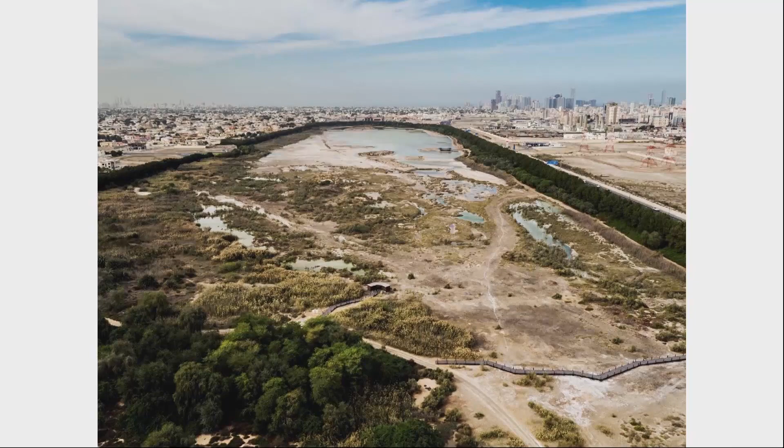This is the first project, the Wasit wetland. The wetland is located in the periphery of two emirates. On the right side you have Sharjah, and on the left side you have Ajman. It's quite strategically located, almost a perfect land to be developed as real estate. It has a lot of value, like many other wetlands in our area.

Having said that, this area was a kind of dumped area, a construction dump area. Over time, lots of toxic plants and bushes had grown, which had in a way damaged the environment. So the whole idea was, how do we work on that? How do we purify the place, and how do we rehabilitate the natural environment within this place?

The government had started the process of purification, removing all the toxic plants, which in a way started attracting many birds, both regional and migrant, as this was one of the few wetlands in the region still functioning as a wetland. It almost became a haven for the birds, so they all came there, nesting and living there.

The process started almost by looking at the section of the site. What could we do? Looking at the existing trees, what are indigenous, what are not indigenous and maybe harmful to the environment. We started by looking at the vegetation, and at purifying the existing water. Of course we had to get rid of the rubbish and the construction dump that was there.

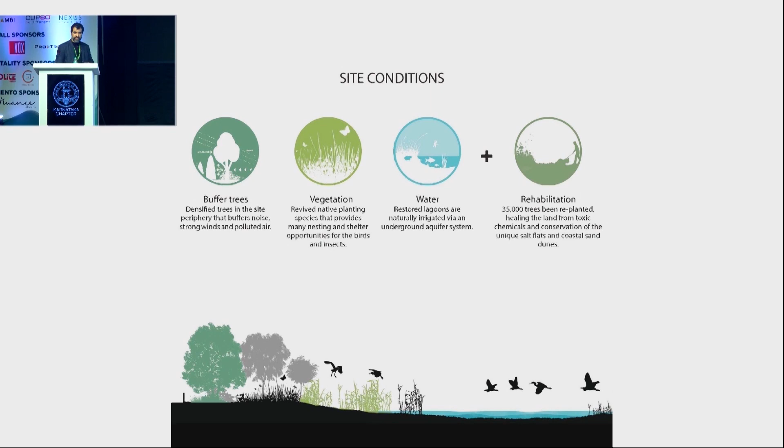So we had to design a breeding, research, and visitor center. The idea was to educate the public about the endangered birds, and at the same time the importance of rehabilitation and cultural or natural heritage, and the importance of passing the natural heritage from generation to generation.

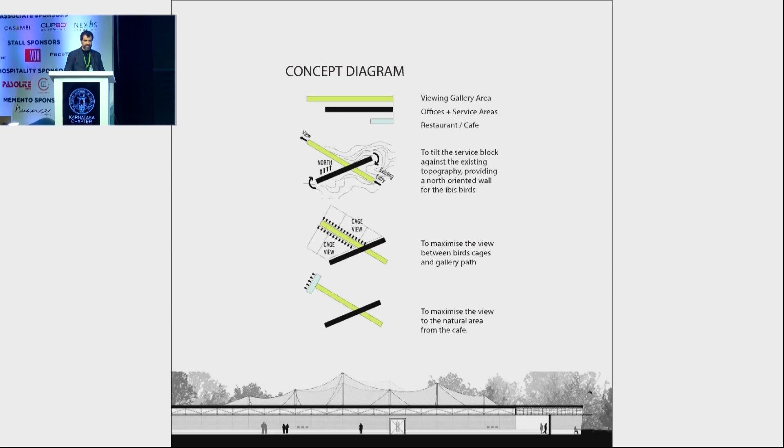So we started, like any other architecture project, by looking at the site, trying to understand the context, the best views, the programs we have, and the requirements even for the birds — some birds need only north light. So how could we design an architecture that could really respond to that, and do a building that is sensitive to the place and to the bird, attracting more birds rather than pushing them away or creating an uncomfortable environment for them?

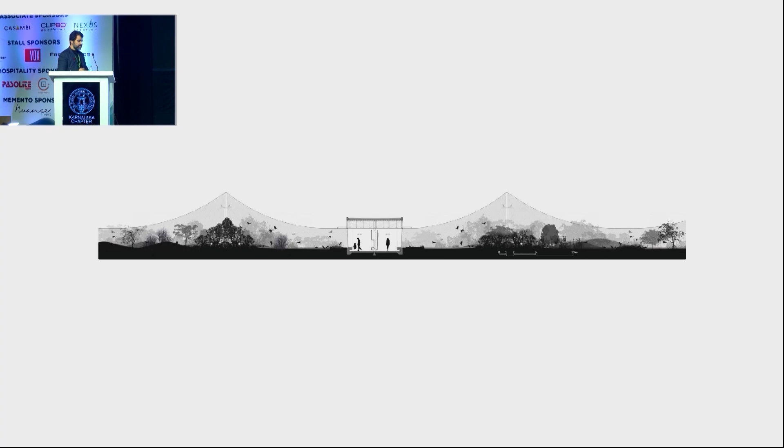We started looking at the site and found there is this beautiful change of topography that happens on the site, with two levels. We thought that instead of building architecture and landscape around it, what if we integrate the architecture and the landscape, and camouflage the architecture with the surroundings? This is the section that shows how the visitor center, the cages around it, and the landscape are all integrated as one entity.

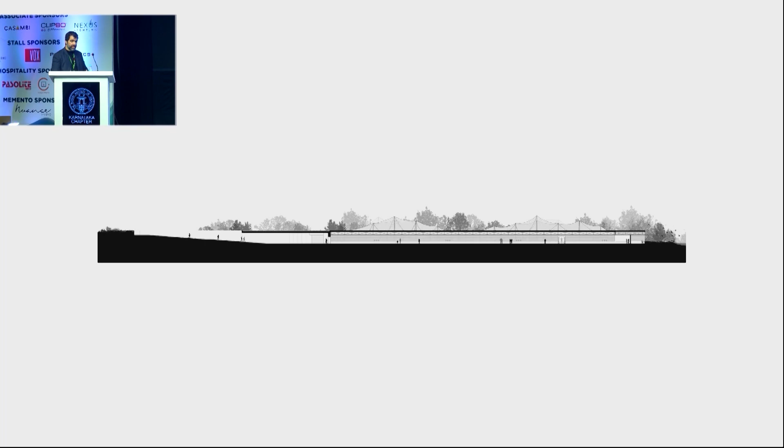As a human experience, again, we wanted to give a different route, to respect, or to minimize the interaction between the people and the birds on the site. So here, as you come in, you almost submerge yourself into the ground, and then you enter the gallery. This is the look and feel, the architecture, how it integrates with the surrounding natural environment. So almost this concept of zero architecture.

As time passes, the trees are growing, the bushes are growing, and in a way they're overtaking the architecture. The people who are working and managing and functioning in this place always say that even when they have some birds in the cage, when migrant birds are flying on top of it, the moment they see their colleagues, they land in this place. Almost the approach to architecture has increased a lot the population of the birds and the nesting, both naturally and breeding on the site.

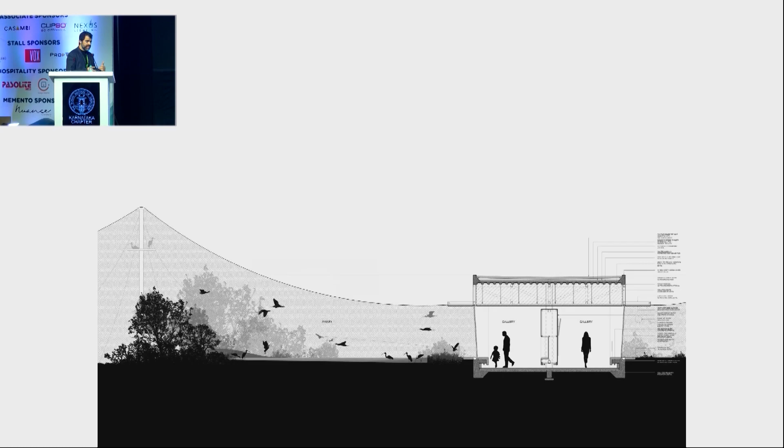So this is the section, just to show how the architecture in the section integrates with the surrounding. We have almost the level of the visitor center a bit below the landscape level, and that would give a very intimate and close experience of the people to the bird.

The way we've designed this skin, you have the glass tilted, both glass. As a result, it reflects the surrounding environment, and the birds could be very close to the glass, but yet being very comfortable. As a matter of fact, sometimes I go there, I see the birds are nesting 20 to 30 centimeters away from the glass, and you could just sit there for an hour and watch them, and they are neither disturbed nor do they move, which is quite significant.

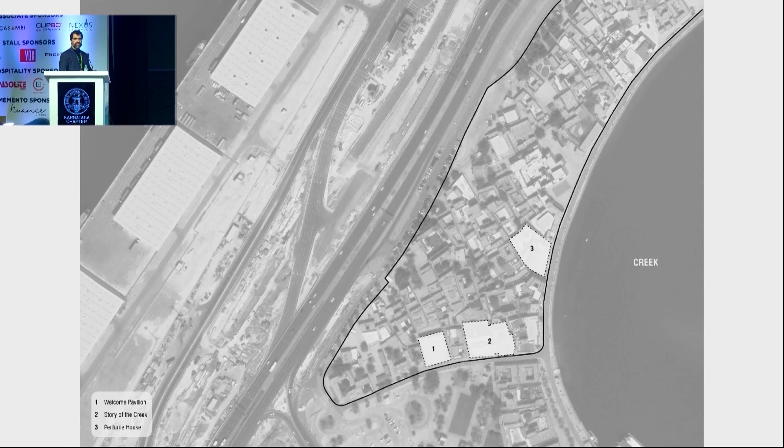So here we had to do a visitor center and a multi-purpose hall, and then regenerate two of the houses into museums. All the areas here for the Expo 2020 had been regenerated into a cultural district. So currently, if you go there, there are many museums, many auditoriums and activities that bring in people. So they needed a center - that's where it becomes the place for people to gather, to get to know about the area, the history of the area, and to be a multi-purpose place.

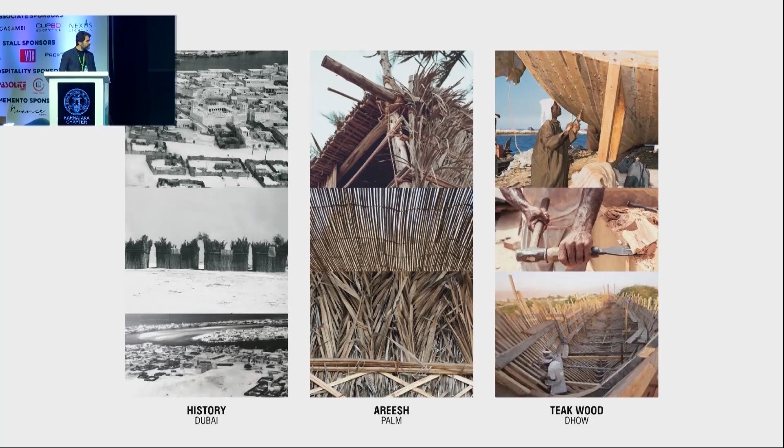We started by researching the place, the history, and the building material they used to use a lot, areesh, which is palm wood, and the quality of shade and shadow it gives in a very organic way. But also the use of teak wood, which was quite resilient to the environment there, used both for architecture and for boat building. So we thought, how could we learn from these but still design an architecture that is very modern and contemporary, but sits well in this context.

Our site was kind of a plaza, surrounded by this historical building. It was a challenge how we could minimize the impact and do an architecture that talks in nice harmony with this surrounding.

So we started using this idea of a roof made out of teak wood, which is a bit translucent and allows shade and shadow to come in. It almost changes the interior and surrounding effect based on the sun, the orientation, and the color of the sky.

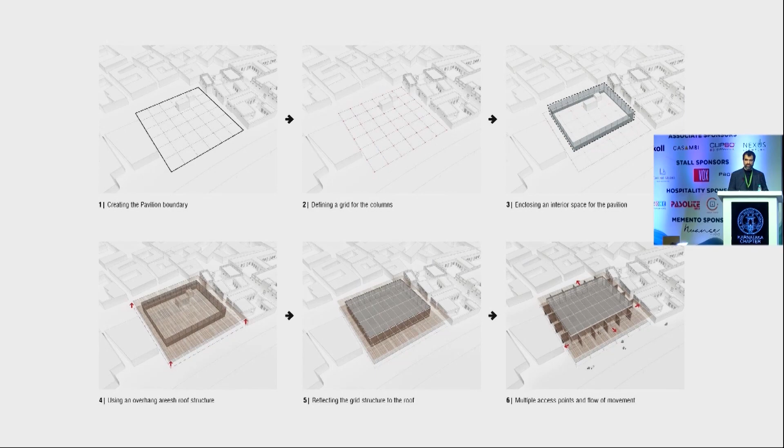But we wanted to maintain this concept of the plaza, this openness, so that six months of the year we could have an open building functioning as a multi-purpose place, and the other six months the idea was to close it and make it an enclosed building. These were the floor plans.

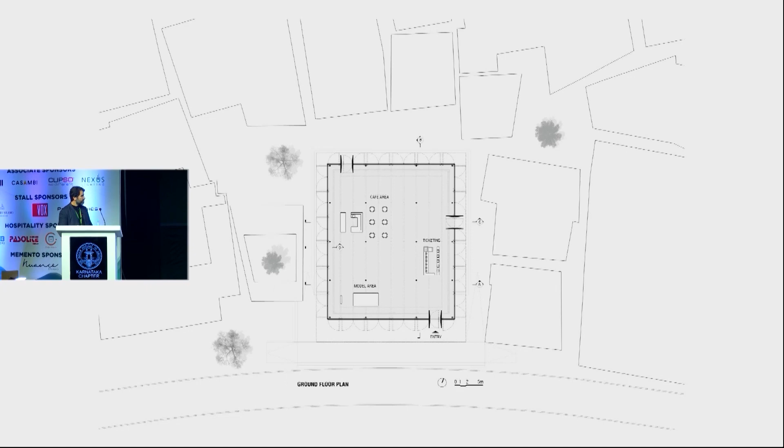It shows how the building sits with the surrounding. To achieve the lightness and openness we wanted, we had to minimize the amount of utility and infrastructure to make the building much lighter. Many of the utilities, especially the AC ducts, are integrated with the floor, which requires less energy but also reduces a lot of systems on the ceiling of the building.

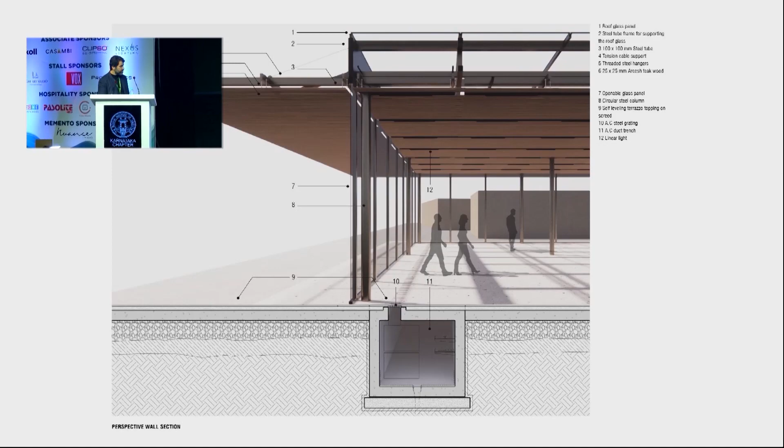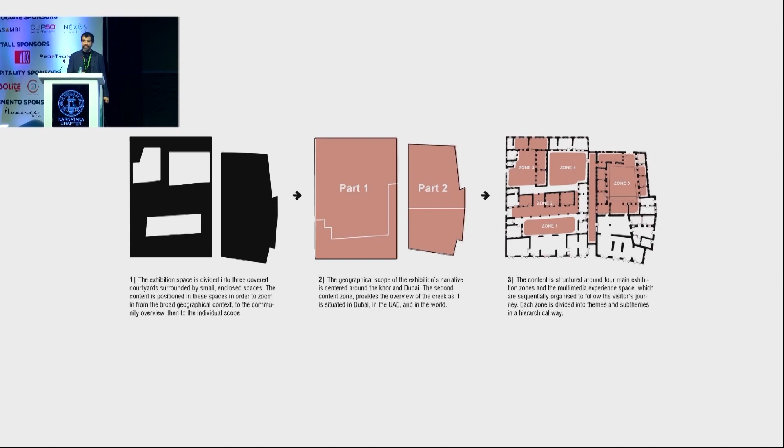With that, we regenerated two of the houses next to it. In this case, the houses were more or less in a good condition. Of course, we had to protect lots of the area, and we had to respect all the existing condition.

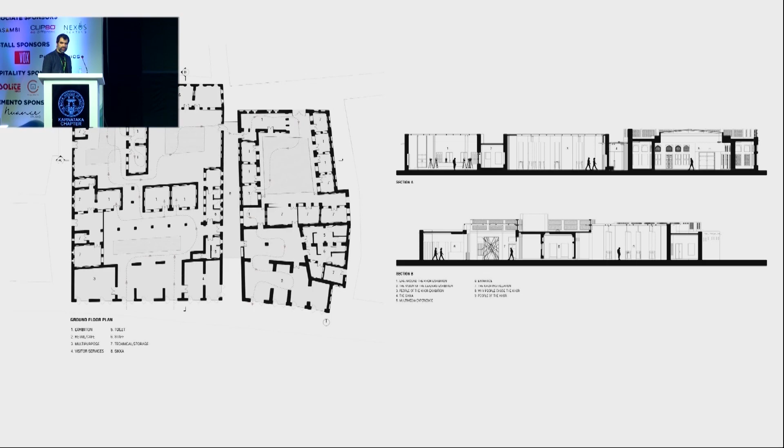It's always challenging how you deal with MEP. You cannot cut, you cannot drill, you cannot do anything, but at the same time you want to modernize the building, bring in new technology, and make sure the building communicates with people in a very modern and contemporary way.

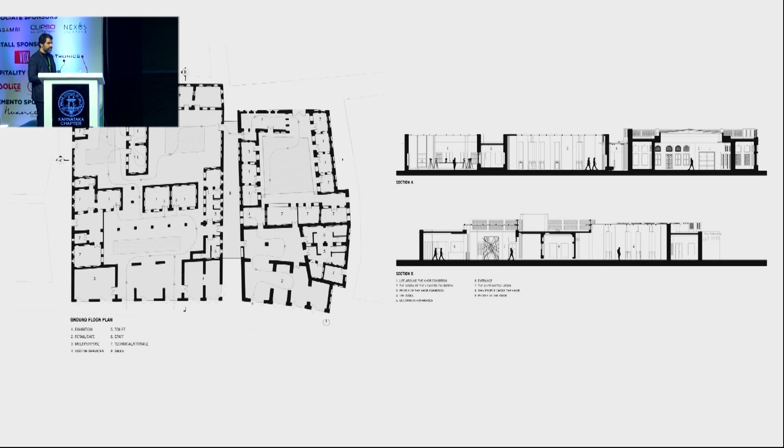So these were the floor plans. We started to define the journey, to curate the story. In this case, it's the story of the creek, which talks about the importance of the creek to the economy of Dubai, how it was made, how it was built, and how it has been evolving over time.

All the walls, the flooring, the wood, in many cases, are regenerated - the existing ones that had to be reinstated have been reinstated and put back in place.

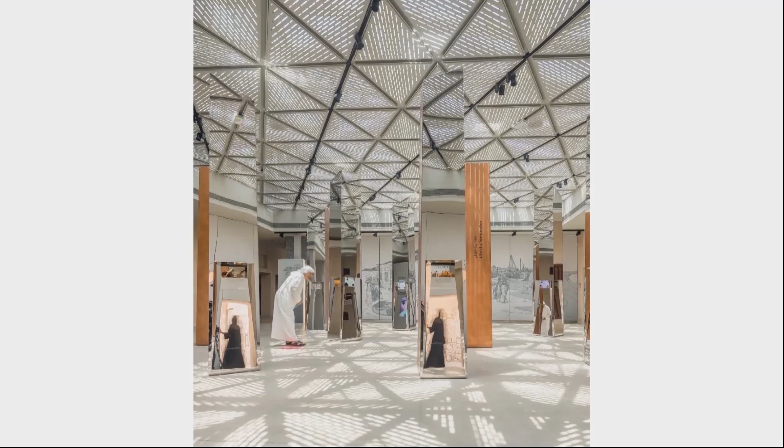Again, this shows the idea of the creek and how it acts as an urban connector, connecting two sides of Dubai, Deira and Bur Dubai, and at the same time becoming a kind of economical connector between different cities around the Gulf.

There's always, when you have historical fabric and you're doing this work, you want to add something - it has to be a secondary wall built in order to protect the existing structure. The lighting or even the flooring, if you build something new, has to be elevated in a way to always respect what's new and what has been there historically.

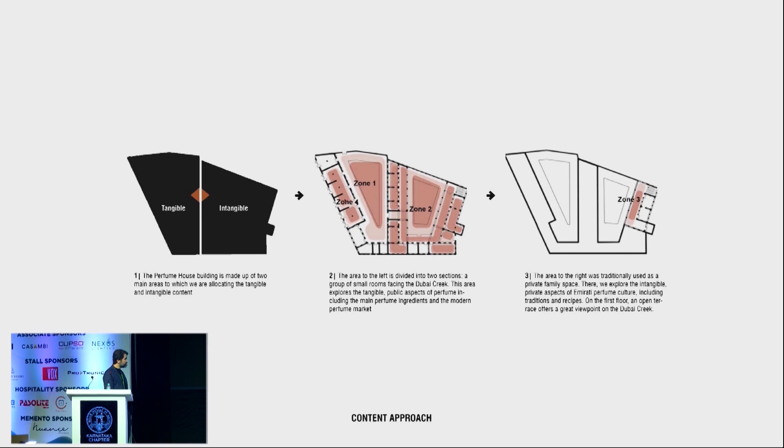That's another house which was regenerated - this one is the perfume museum. The perfume in our region is very much inspired by Indian perfume, oud and dehan oud, majority of which are coming from India. So the burning wood and the smell of burning wood.

So here, the whole idea was to explore the history of that in our region, and then give people the ability to test different perfumes and make their own perfume based on what they like.

So here, as you see, the idea of integrating the courtyard as part of the experience of the people, being part of the curatorial process.

Again, the entrance, the doors are very sensitively restored in these places. And the spaces, yet, I mean, definitely they are very small spaces - environmentally, that's what's very...

The walls are quite thick in this context, and the spaces are very small. But within that, we had to regenerate and bring in a new program and activate it in a very modern way. So some of the images here.

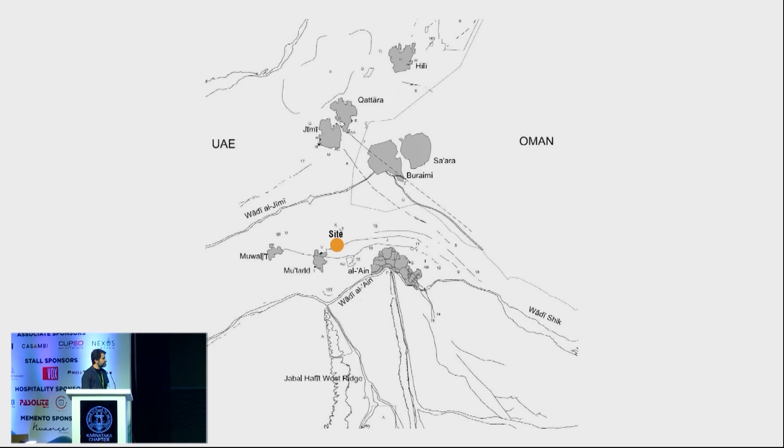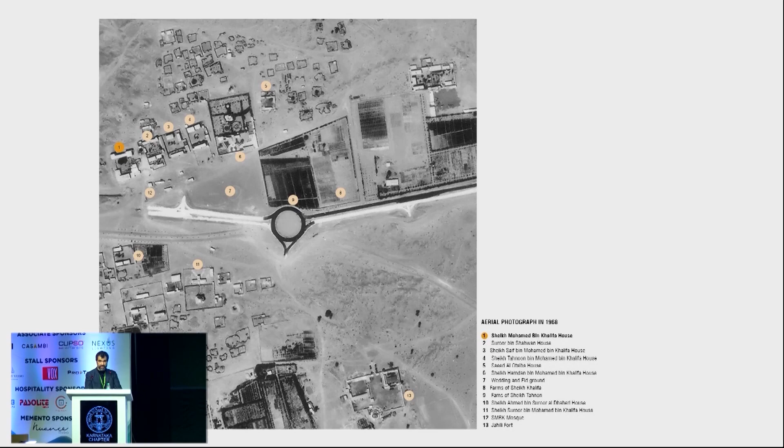This is another project, again it's a restoration. It's in Al Ain, around 2 hours from Dubai. The significance of this house is that it's one of the first houses built out of reinforced concrete, in the late 60s, but at the same time it has a very vernacular architecture and look and feel. So we had to regenerate it.

This was the condition when we started the project - definitely it was in a very fragile condition. But in this case, we wanted to preserve almost everything that you see here. We wanted to make sure every facade, every column, every wall, every stone in this building has been preserved, and then we add to it in a way to protect it and bring it to today's standard and requirement.

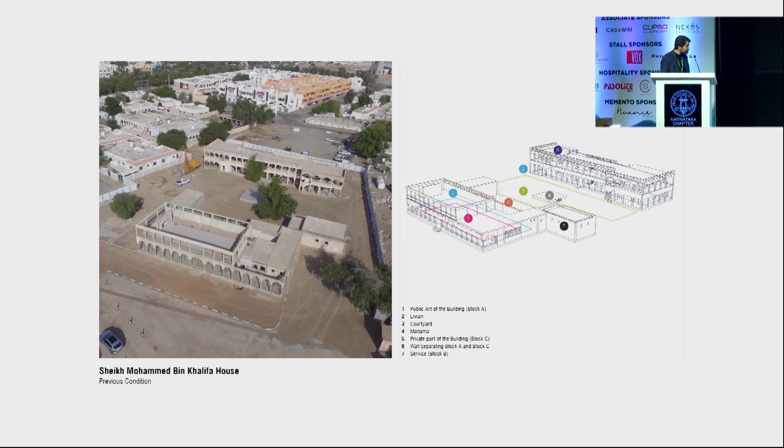We started by looking at the history of the house, where it started. It has been many phases, many add-ups, bits and pieces. So the family started, and as the family grows, as the requirement grows, the economy grows. Between late 50s and then goes to 60s and 70s, those were quite a time that the economy was growing, so you see that the house has been growing over time.

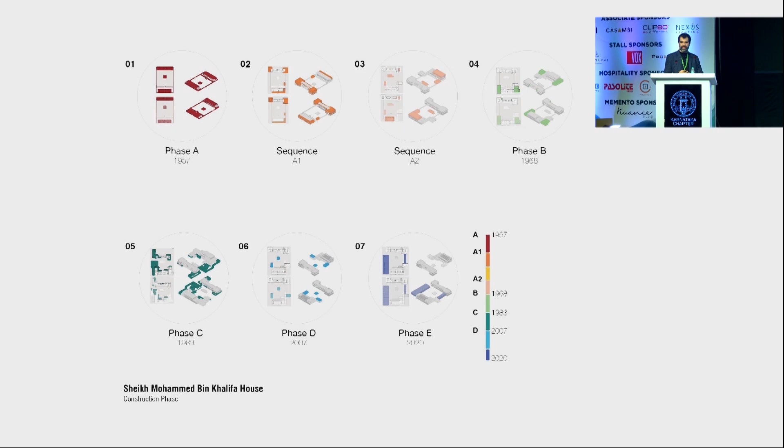The idea, we had even new program that had to build into it. In this case, we wanted to make sure that it's a cultural building, but at the same time, it's a very social and active place. So the program was very mixed. It's not only a museum, it's a museum, then it becomes a kind of conference space, it has interactive kind of halls, it has cafes, it has an art workshop. So it's quite a very mixed use.

So the idea is to bring back people. It's not that people go there and say we've been to this museum, and that's it. No, you could go back only for your morning coffee, or you could go back to paint, or you could go back to a library to read, and so on.

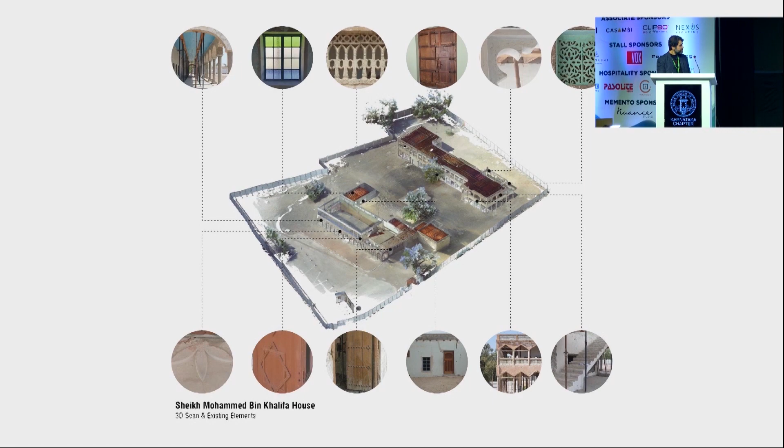So we started by almost doing a full laser survey of the project, fully in 3D, and identified different elements that were significant, that needed to be preserved on the place. And these were the conditions of the place.

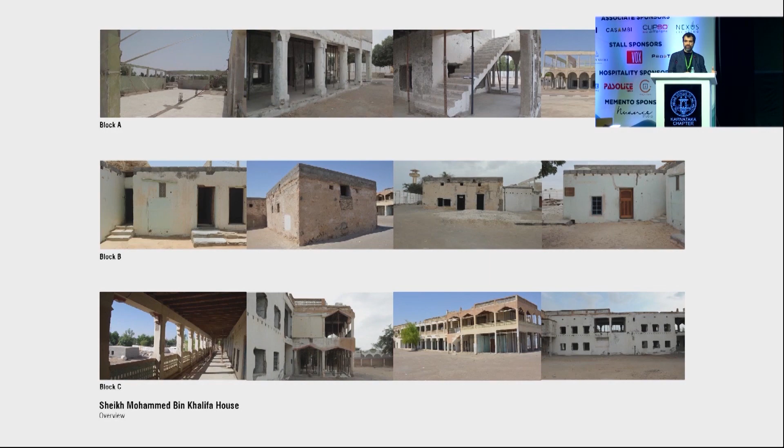Both at the time, we've almost been 50 years, so it's not in a very good condition. But at the same time, the way that it was built, being the first concrete construction in that city, it's not done in a very good way or very good quality of concrete. So the idea was, how could we work with this context?

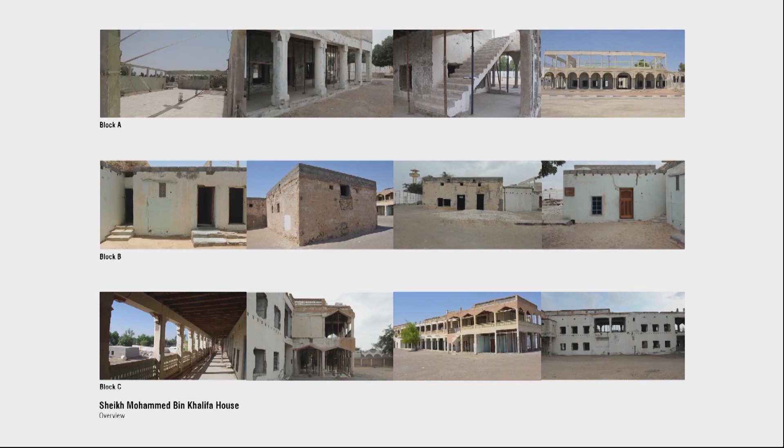And how could we regenerate, and how could we respect every element within this project? So we went further. We analyzed the kind of elements, the textures, what is there, and how could we really preserve it. And what are the textures that we want to learn from, and we want to bring back, or retain, or maintain as we start to move forward?

There's always this debate: do we really take it back to the state of what it was 50 years ago, or do we keep it as what it is now? And the new intervention, how is it going to talk to the existing condition?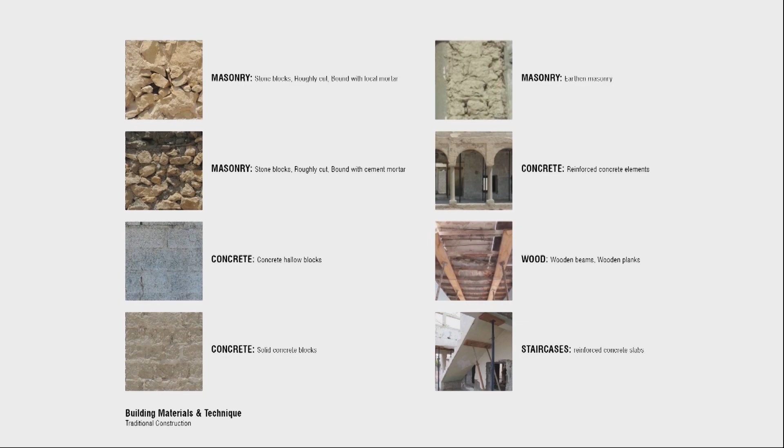So here we went deeply into the place. Again, the construction technique is totally different. You've got from masonry, stone blocks, all the way to concrete. You've got all the way to staircases, you have the concrete blocks. So almost every extension has a different construction technique that had been used based on the know-how of the laborers that were working at that time on the place.

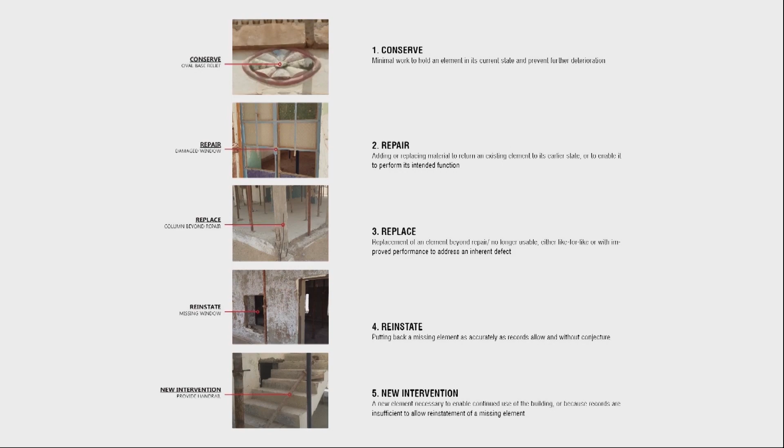Based on that, we did these categories: what elements to be conserved, what to be repaired, what to be replaced if it really cannot be repaired, and what to be reinstated.

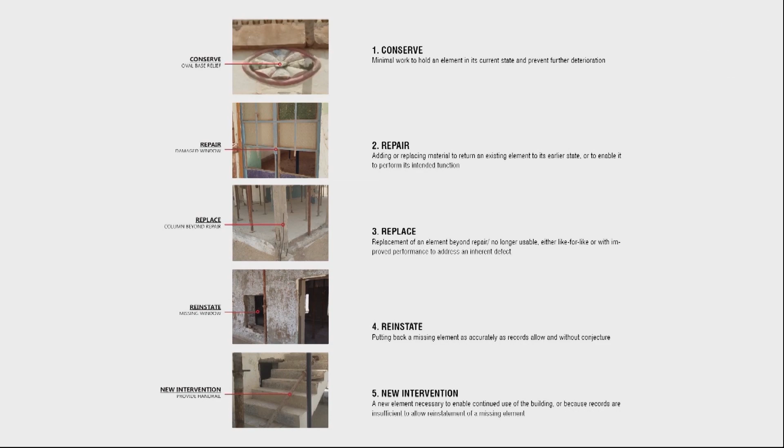So there are elements we know, like the windows. Some of the windows are already there, as you see it here, but some of the windows are gone. So what does it mean? How do we reinstate it? And the new intervention—like, for example, the handrails are not there, they are gone, and there's no historical reference to how it looked like. So how do we deal with all of this different condition?

So these were the kind of matrix of conservation strategy for different blocks and different sections. And these were the floor plans.

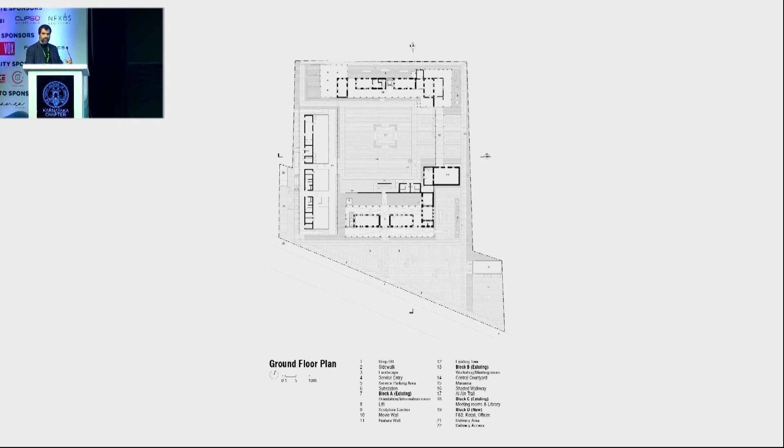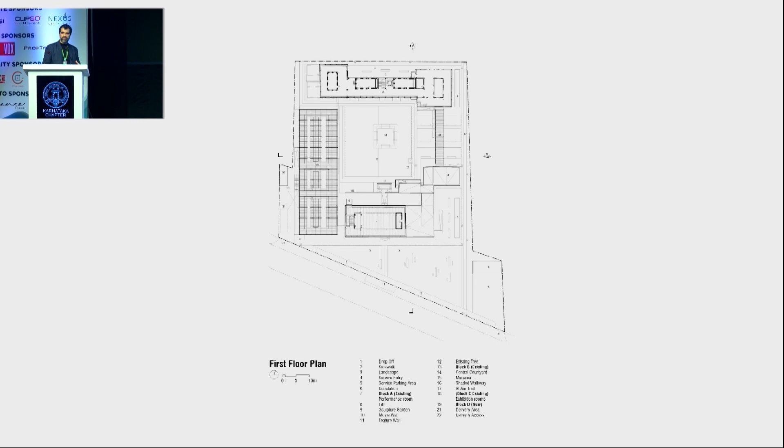But at the same time, this extension works in a way to reinstate the feeling of the courtyard which this house had. The house had a very active courtyard, which was always a private place. So we wanted to reinstate that by building the extension in the same position where the compound walls used to exist.

So these are some of the drawings. It shows different components and how old and new are coming together. And these were the process of regenerating every facade — quite very intense. As you see here, we start to look at the window detail and how we could really regenerate it, reinstate it.

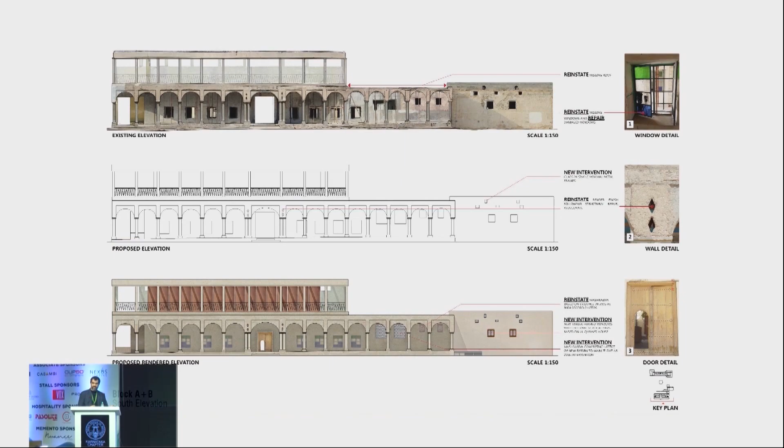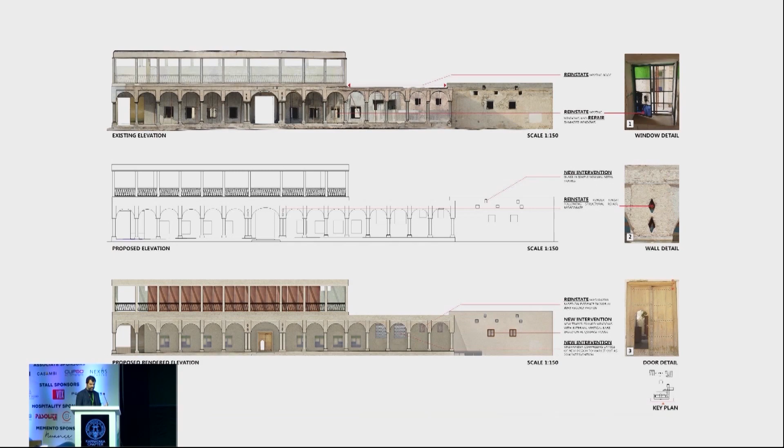We look at the decorative elements, the doors, and some elements that weren't there, and then we start a new intervention that shows this is an intervention from 2022, but at the same time talks nicely to the historical fabric. So it almost becomes part of the journey and part of the history of the building as we move on.

To do the extension, we wanted again to talk to the existing structure. We wanted to do architecture that works in harmony. Of course, more contemporary, with its own language, but at the same time it has a repetition of elements inspired by the existing structure. So we looked at the proportion.

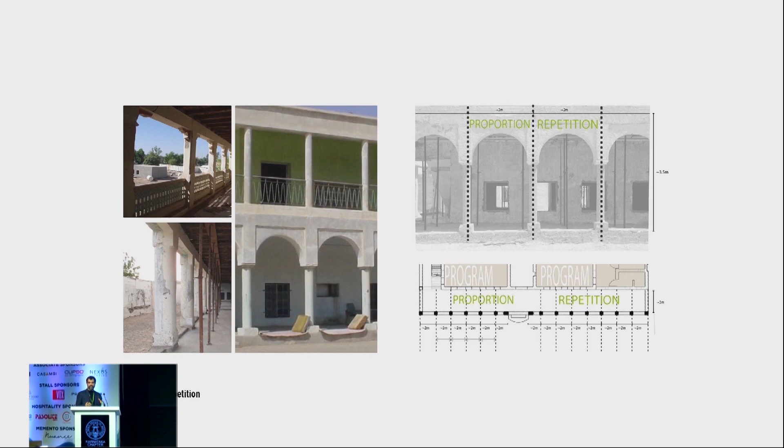We looked at the idea of repetition, the idea of the arcade. You always have an arcade, which used to protect the building from the heat and the sun, and then you have the actual usable spaces. The project is an oasis, where you have lots of palm trees. We wanted to learn from all of that and develop architecture that is more modern and contemporary, but inspired from that.

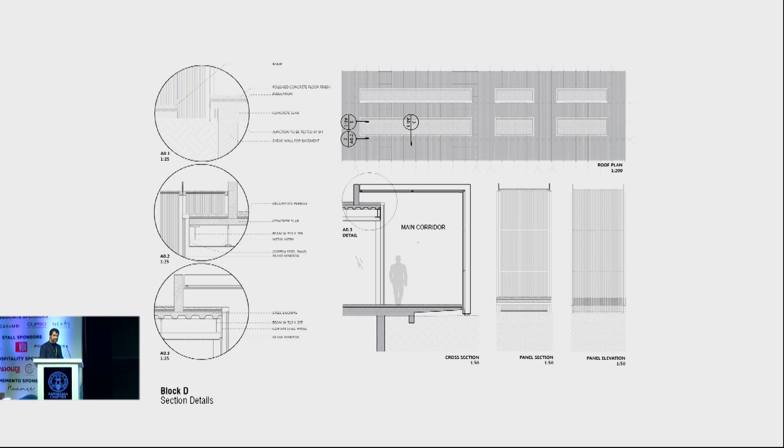So as you see here, you have the skin, which is inspired from the arcade, and then you have the arcade itself, the interior, and these steel elements that are kind of repetitive.

It shows the relation between the new extension. As you see here, you always have this repetition—this steel that creates the rhythm, the sense of arcade, but at the same time it's very light and done in a modern, contemporary way.

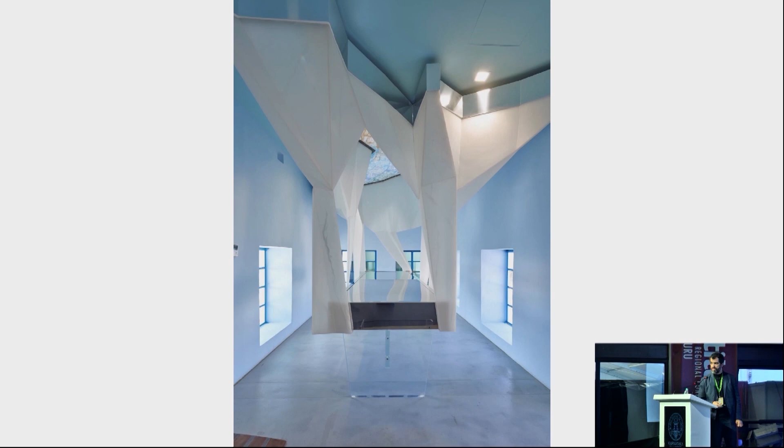Some of the exhibitions here again show the history of the house, the history of Sheikh Mohammed bin Khalifa.

And these are multi-purpose rooms that become classrooms, become an educational facility, become an art place.

But at the same time, it was quite important to position the building in the same place where the compound wall was, to give the same feeling of the courtyard and the same scale of that courtyard.

So in a way, the way the land art works, we wanted to have a minimum impact on the place, but at the same time give people this really unique and sensible environment.

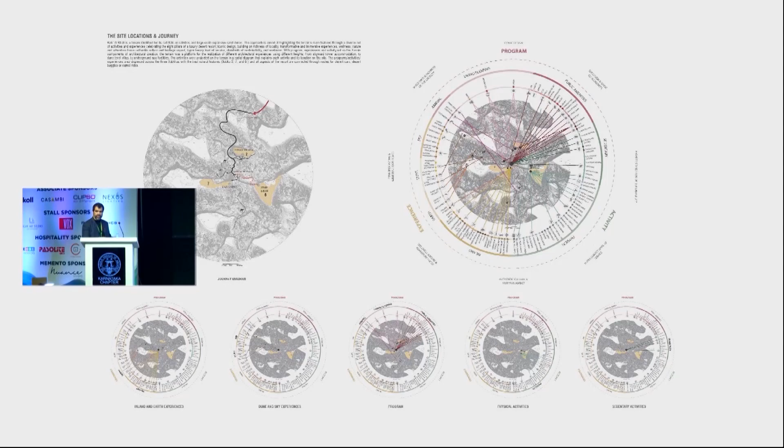So we started by mapping what could be done, activities, mapping a journey, how we want people to experience the site. In between the dunes, what could be the best experience, arrival experience, sometimes being on the tip of the dune or becoming the different sections or different heights of the dune.

And based on that, we got inspirations for different assets. So here is maybe one of the inspirations - the idea of tracing on the sand. As you walk on the sand, you start to leave these traces, which in many cases have been used to regenerate new ecology, create an oasis, or a place for farming, and so on.

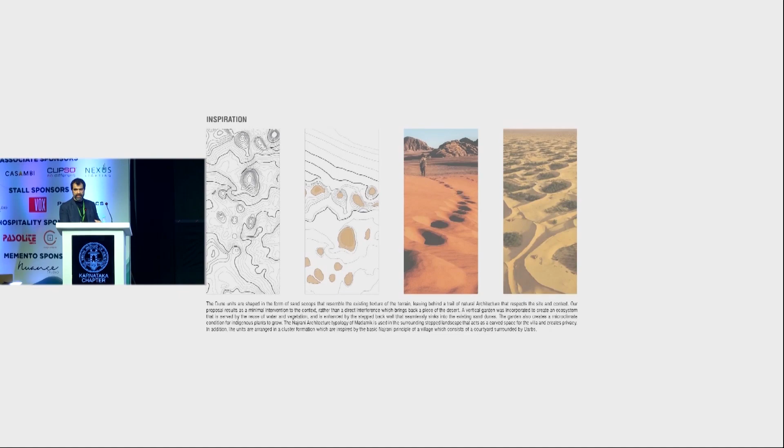So we thought, how could we really create a kind of landscape or architecture that almost builds itself within the sand and gives people a very deep experience of the sand.

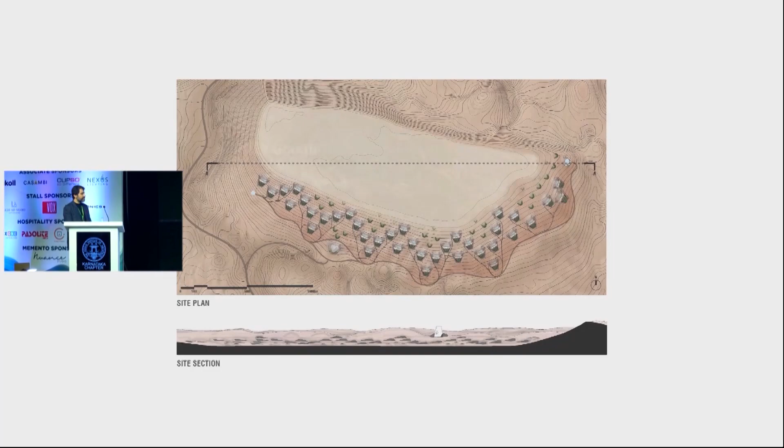So here were some of the sketches that were done - the idea of learning from the sand, how the sand reacts, the idea of how we could maximize the view, give every unit privacy, but at the same time they could have a maximum view of the surrounding. And these were kind of one of the assets that is built itself into the sand dune.

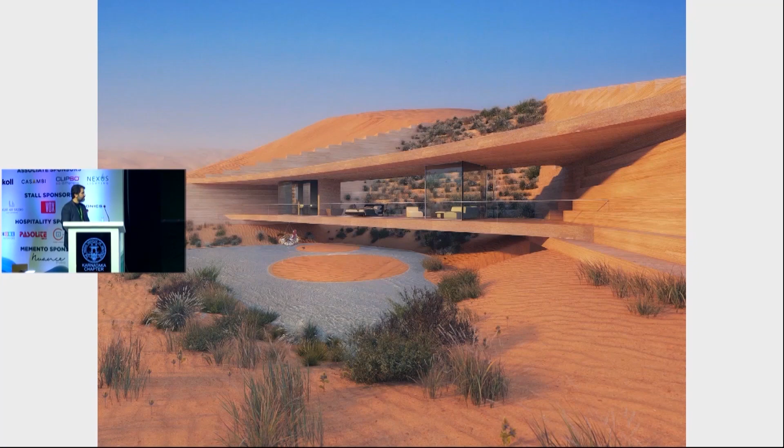As you go there, you're almost part of this desert. It's the only moment that you have a very close scale, so you could define the scale. You could be in the desert, very close to the sand, and have your own privacy. It's a very unique and different moment—this flexibility of opening the architecture when required, and closing it when required.

We went on and looked at other assets—other elements. We found these beautiful flowers on site, and what really inspired us was the way these flowers grow in this heat and protect their core against this kind of harsh, warm, sun environment.

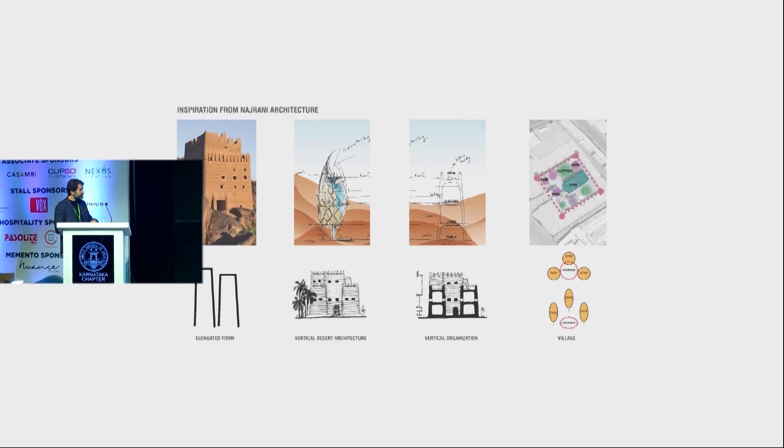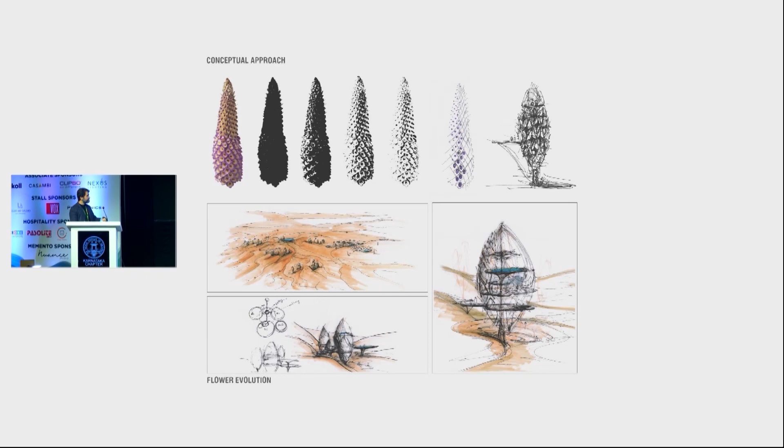So we thought about how we could do architecture inspired by this, while also looking at regional architecture. This idea of verticality is very familiar, giving maximum views to the surroundings and a totally different experience to people in that place. These were a series of sketches done, relearning from that vertical element and how it could become architecture.

And these were the final images—of course, this was the image of the competition that we won. It has evolved and developed quite significantly since.

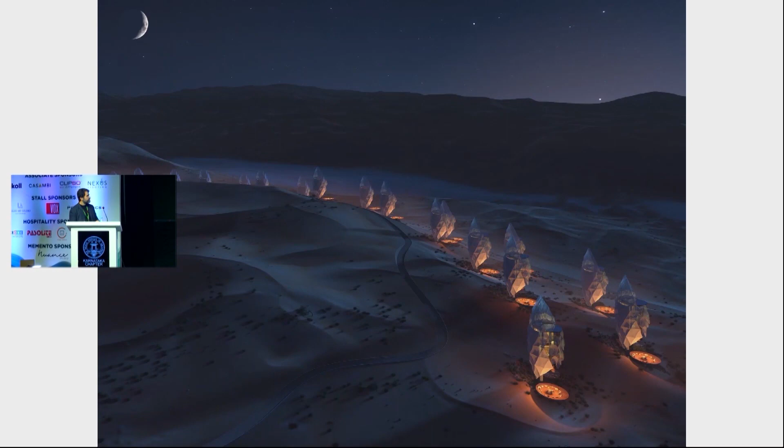As you see here, you have the skin that opens up and closes down based on the requirement—privacy, environmental, and so on. People could really go up and have a wonderful experience of the place and of the surrounding dune.

So that's the view looking at it from the top, and that's your view as you go into the resort. You have almost this beautiful 360 view of the surrounding, which is very unique, and it could only happen in this empty quarter.

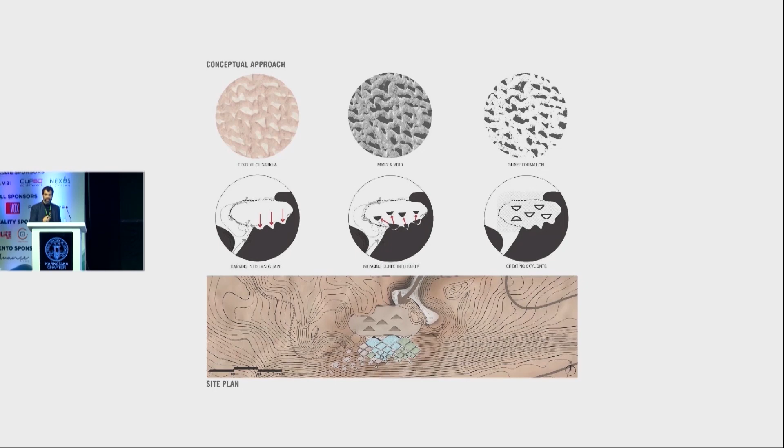We looked at other assets—we had the arrival halls, the restaurants and amenities. In this case, the conceptual approach was to use a place that is a peak, quite unique, giving people a very unique experience of the place, again inspired by the movement of the sand.

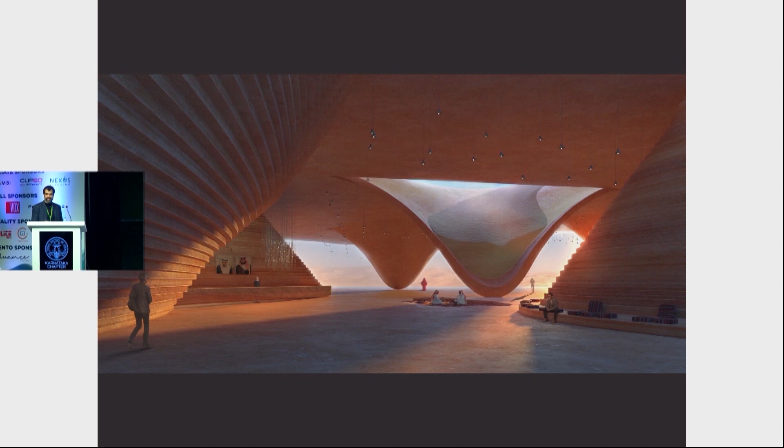So here, the whole architecture is inspired by the movement of the sand and the way that the sand folds and unfolds itself.

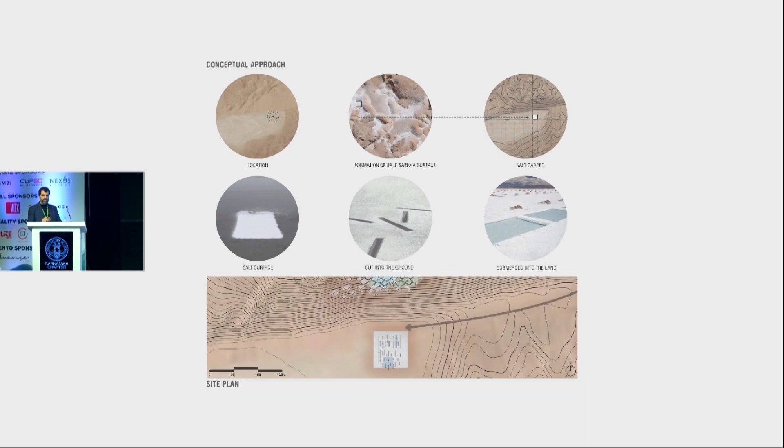The last asset we had was the spa, which was quite important. We wanted to have this relation between the spa and the salt, which is in Sabkha—you've got a lot of salt, a lot of salty water—and we worked with a spa expert on how we could use this as an element to give people a unique and different experience.

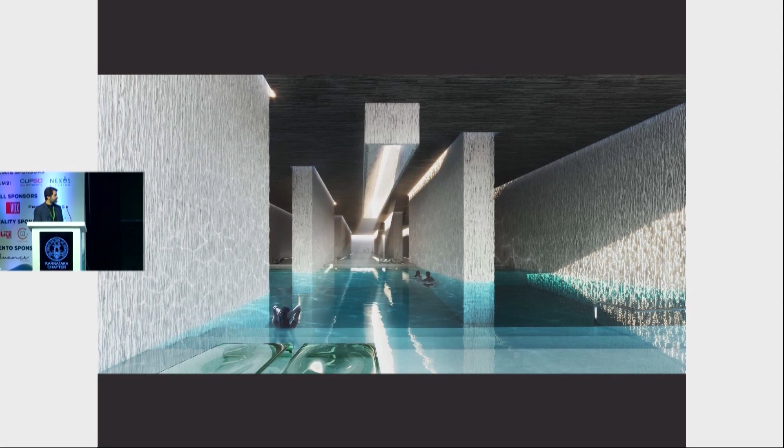So these were conceptual approaches. We had a surface activity and then a below activity, and this was the look and feel, which is totally in contrast maybe to the other asset, but at the same time very contextual to this part of the desert we were designing. This is the look and feel of the inside, and these are the different assets and experiences that people could move through from one place to another.

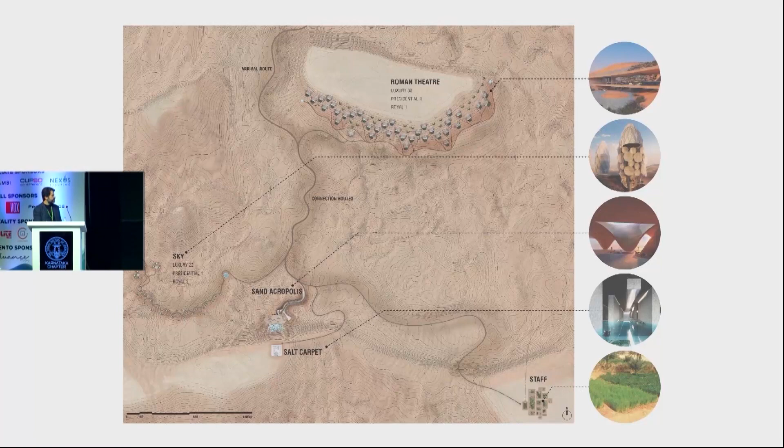Of course, for us as architects, we have a responsibility to save our resources. So we have used multiple active and passive strategies to preserve energy and to do architecture that performs much better, reducing a lot of energy consumption and resources.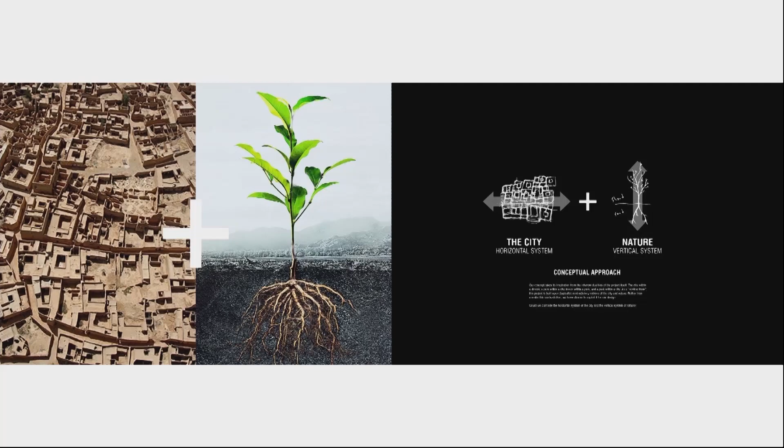So we started by looking at the place. Cities are always organized in a very horizontal way, and then you have nature, which is very vertical—trees are always vertical.

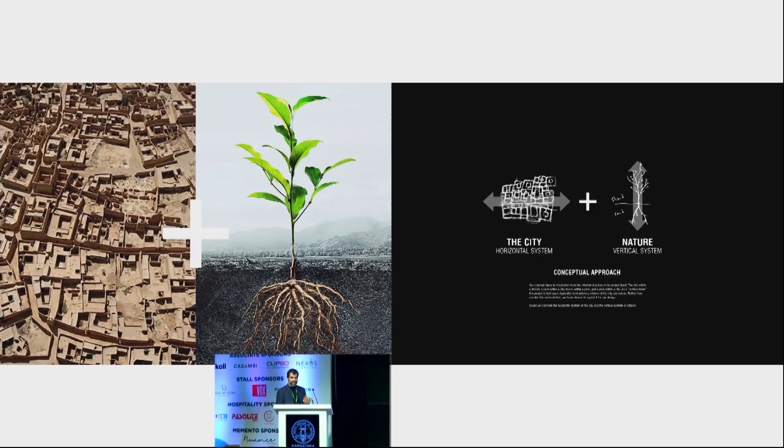So the idea was how could we really learn from these two and do an architecture that could accommodate the necessity, the requirement of the trees, the plants, and all of that, but at the same time is interactive with people. It was very important for us that it doesn't become a place that's only a factory or a place for production, but rather becomes a cultural, social, educational place where people will start to go and learn about agriculture and ecology.

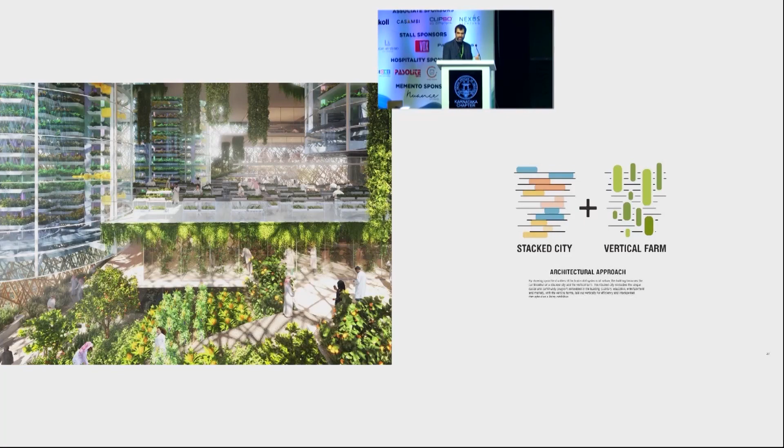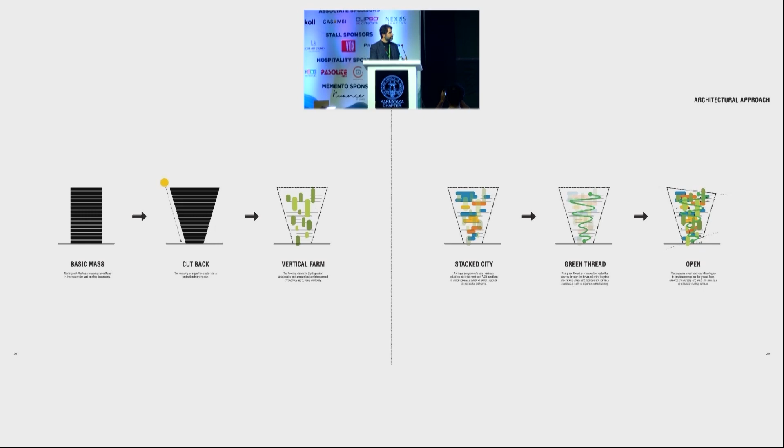So these were different layers that we studied: how the building could react to the sun, the idea of vertical farming, the idea of stacked cities, how we could have different programs coming into it, and the idea of the green thread, which I would go through, and how we could really create an interactive place between the people and the building. So these were the initial sections.

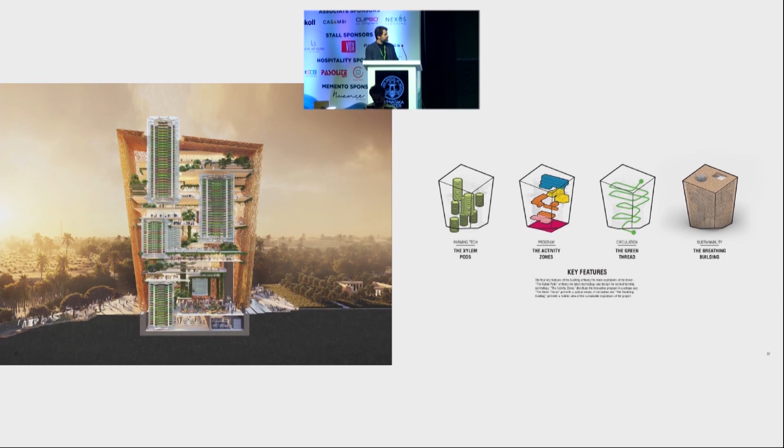As you see, you have these layers of the vertical pods. You have the programs, you have the journey, the public journey, and then you have the skin, which I would come to in a couple of slides. So we started with these vertical pods, and we worked with experts to identify and define

what kind of plant species could be used in this place, and then to design these pods that are kind of independent, that are sustainable, and that could generate the kind of food and agriculture we need within the environment.

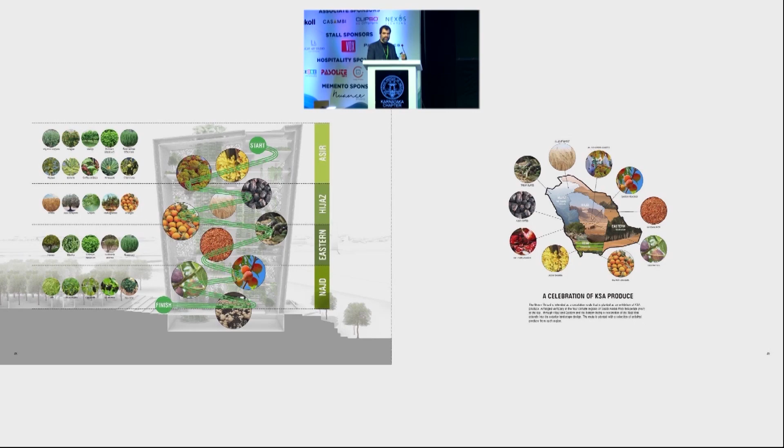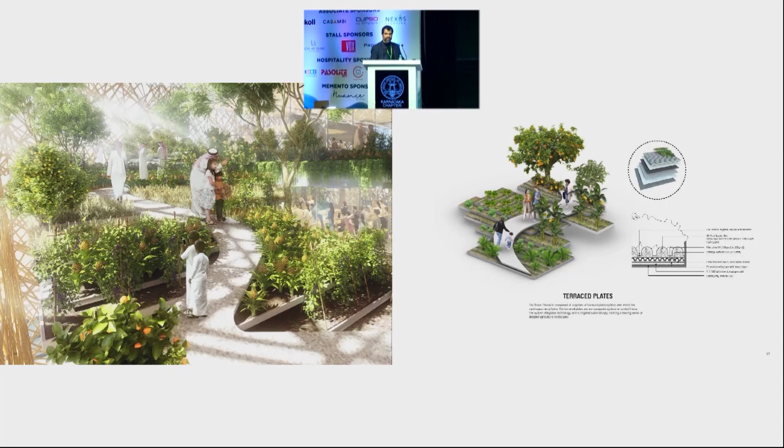Here we wanted to emphasize this by celebrating and educating people about the different agriculture that exists in different parts of Saudi Arabia, and make that part of the public journey. As people come in, they start to walk and explore the place, and they get educated, and they could even pick up their own agriculture products as they move on. So in a way, it becomes a way to educate the kids, educate the public, and so on.

So that's how the building works. As you see, we wanted to make it mixed use. It has offices, a lab, a research center, an educational facility, cultural and social spaces. The whole idea is how we make the building active and alive, so it's not a place you only go to for one function, but a place where multiple things could really happen.

You've got a market zone, which people could go to, and within the neighborhood, people could come and pick up their food. You have cafes where they cook for you food that is produced in this place. So these are some of the look and feel as part of the experience.

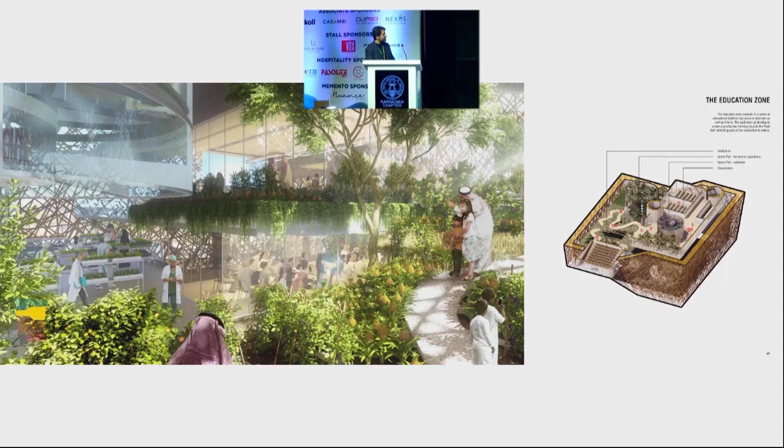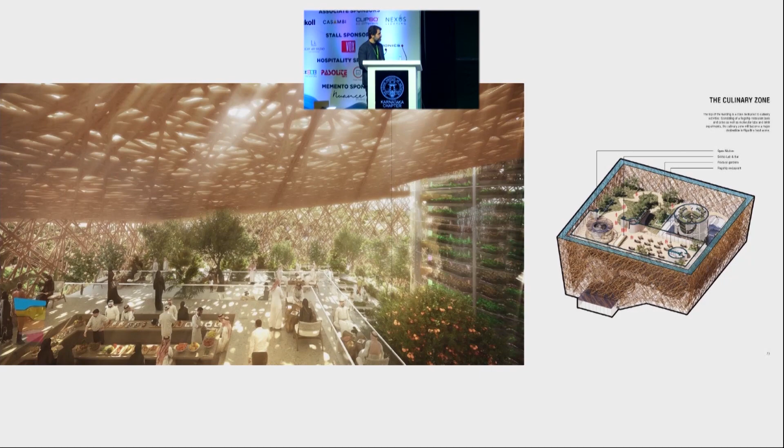You see how the scientists and the public are all integrated, but at the same time they all have privacy. The idea of food and beverage is always very important, and how you integrate it and make it part of the visitor's journey.

And here is the idea of the skin. As you see, the skin has multiple functions. In one case it becomes the structural element, but at the same time it becomes this breathing element of the building.

The building has chilled pipes that run through the skin, which cool down the atmosphere and environment within the building. So many parts of the building from the inside are not fully enclosed - they're open, and with a bit of cooled down environment and the plantation, it almost brings the temperature to a comfort zone.

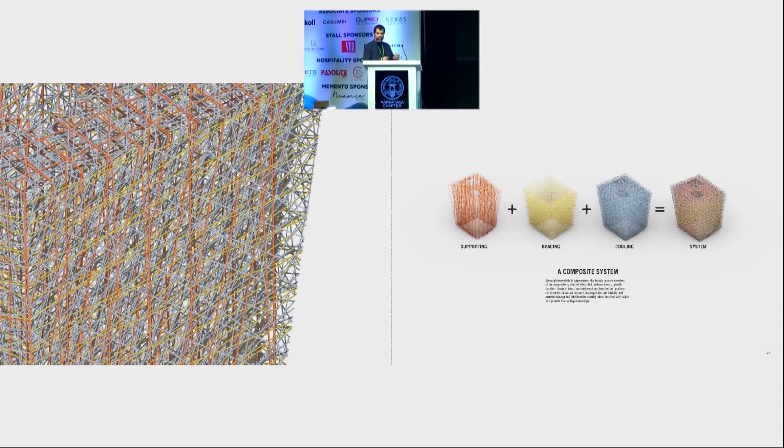And then, of course, you have this idea of the bracing and all of that. So all of that together creates this skin that gives us this architecture.

We looked at different users and different journeys. As I said, it was very important for us that the building becomes active throughout the day. In the morning, maybe you could have kids from school; in the afternoon, you could have families coming in, and people could go there for dinner. So it becomes a kind of building that rotates and has a different timeline - you could go on a journey Friday 10 a.m. for your brunch, all the way till the market.

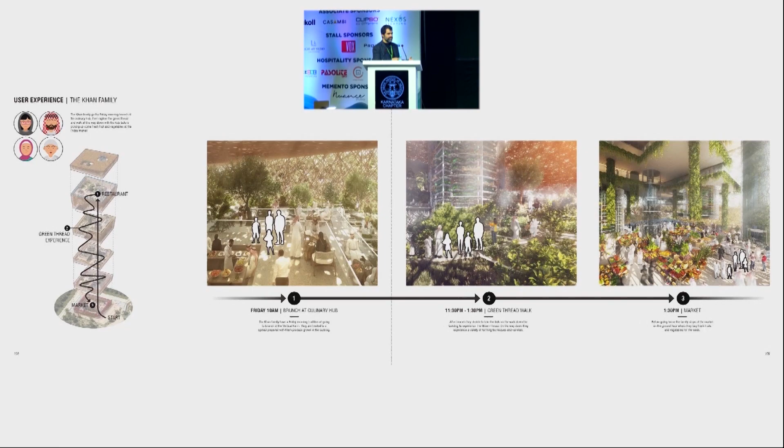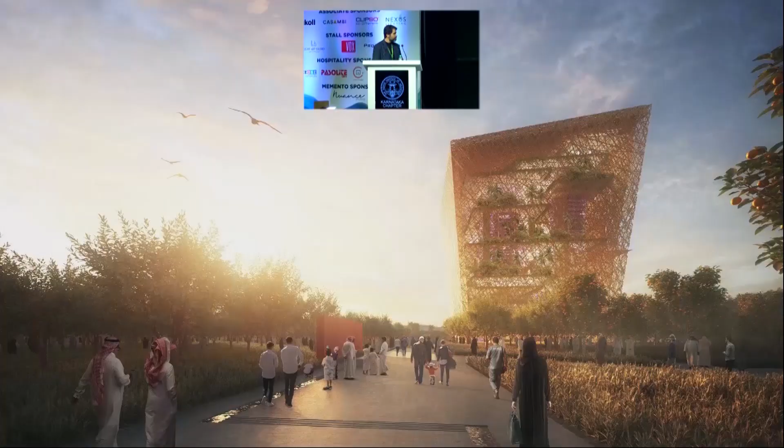Until you finish the work. So that's some of the look and feel of the interior, and how we integrated the farming, the human experience, the human journey, and that's the way the building sits within the landscape.